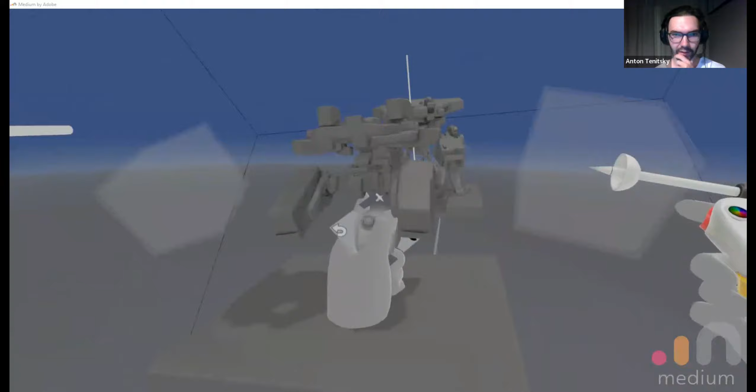That's really cool. So we have this podcast because originally we used 3D Coat, say back 2-3 years ago. So what made you switch from 3D Coat to Medium?

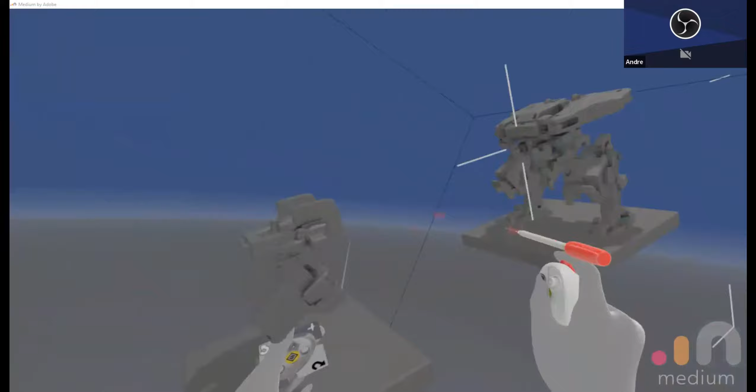It was kind of random. I just picked up a headset one day and was like, 'Oh, I'm gonna try to sculpt something.' I really enjoyed working in 3D Coat because it was voxels, and Medium is the same way - it's still voxels, so you can sculpt away at stuff. It works kind of the same way, it's just I find it so much faster for concept. I can make stuff really, really quickly, and for concept, speed is really important. So that's what made me switch.

I find it just more free to sketch in VR than on a screen. So what I find myself doing often is just switching to top view, left view, right view in 3D Coat to do something - and here you don't have to do that, right? You don't have to. I can sculpt something on top and then go underneath. I don't need to isolate the part and then go sculpt - I can just directly go under the thing and start sculpting.

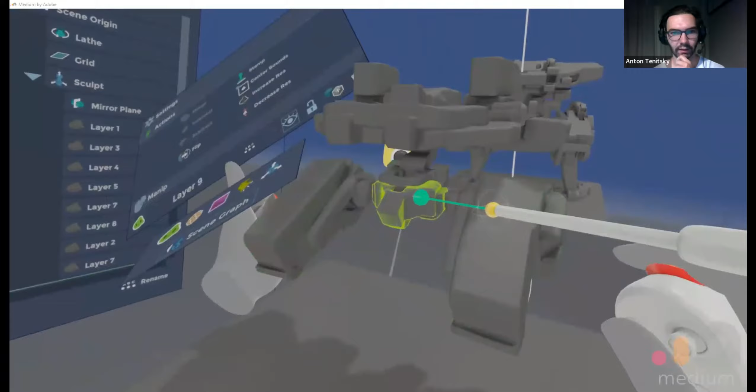And did you ever think about doing a sketch here but then doing a final or semi-final polish in 3D Coat? Did you ever have the need to do that? I tried it, also tried it in ZBrush, but at the end of the day I don't really need it. Everything that needs to be really polished, I can either paint on it or give it to a 3D modeler that will just take the mesh and do the high res directly from the mesh. So it's super useful in the production pipeline because you don't need to give a top view and side view and different views to your modeler - you can just give them the mesh itself and they can design on top of it.

Yeah, no, it's really interesting. I guess I myself like to do more of a semi-finished piece, so I'm still a bit hesitant to jump on sketching the shapes like that, but I should definitely go and try.

I really wish that 3D Coat had some kind of VR capability.

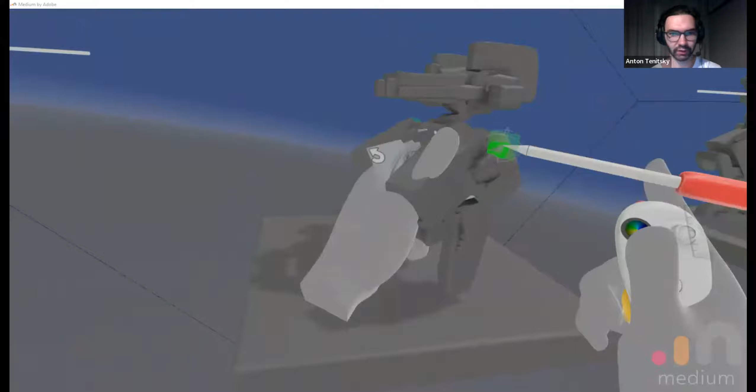So I guess one thing I like about Medium, and what I can see you doing here, is that you're not using that many tools. No, I'm just using one square brush, my favorite brush that I made, it's just like a shape. But I have a bunch of different brushes that I made to sculpt stuff. The tools are pretty limited, there's not a ton of them, but they work super well together.

If you look at this, it's only a couple of tools. I use this, which is like the sphere brush or the clay brush, and this, which is like the pose tool in 3D Coat. You can stretch stuff, and you can deform it.

What's the resolution like, or how big is the model? It looks like maybe 500,000 triangles right now, if you look, something like that.

If I ever need to clean something up, I'll take this part and upres it, then sculpt more details on it. Usually my finished sculpts are around 20 to 40 million for a fully done piece.

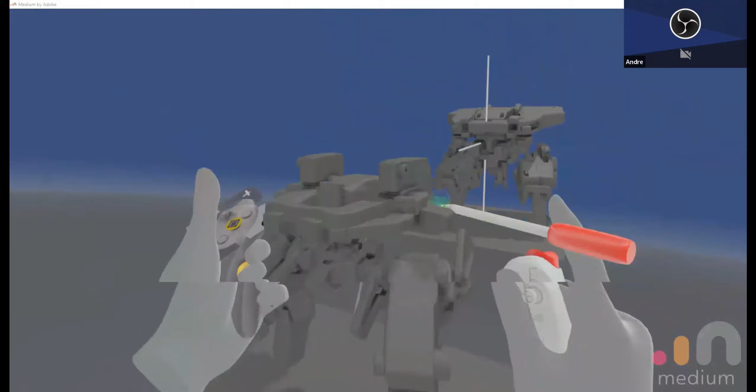Does it have any lag at all? No, the only time it really starts lagging is because there's a limit on the layers, and if there's too many layers it'll start lagging. But most of the time, if you manage your resolution properly... it's the same in 3D Coat, right? If one layer isn't at times 16 resolution and everything's super high res, everything's fine, you just need to manage your stuff properly.

Yeah, there's a little bit of a lag, it goes...

It's pretty cool. We've just been talking about it before the podcast, that you were mentioning Adobe is moving to Substance Modeler now. It's going to integrate with their whole Substance suite, for texture and all that stuff.

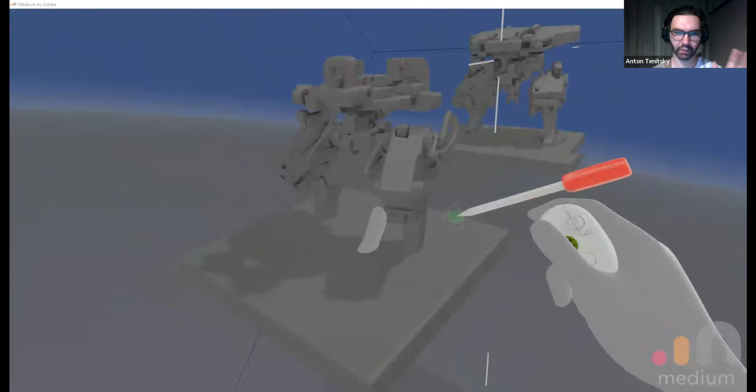Did you play much with it as well? Yeah, I played with it quite a bit. I'm still using Medium because I find it more refined as a product. Modeler is still in beta, so there are some glitches and weird stuff happening, and the tools aren't as straightforward as Medium.

Yeah, that's what I thought too, because I looked at a couple of YouTube videos and it looked like you have to press a lot more buttons, right? Yeah, it's just not as polished.

For sure, one day it will be, and then I'll make the switch. Every new update they have, I try it out and see if it's workable. But when I just need to get something done, I go into Medium because it's second nature, I don't have to think about the buttons, I just do stuff.

And you were saying that Modeler became more of a major focus for Adobe now, that they're not really updating Medium much anymore. Yeah, there's no updates for Medium, but it's still usable and it's free.

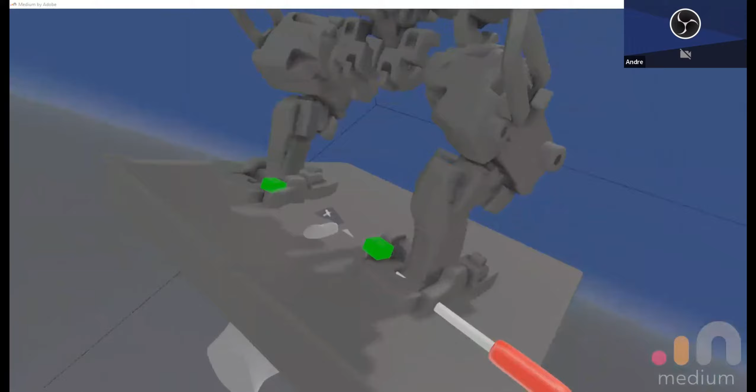And how long did it take you to get proficient with Medium?

You can get proficient really fast because there's not a ton of tools. You're just sculpting what's in your head, so if you're good at sculpting, it's like playing with Legos. In a couple days you can make pretty much whatever you want, and to get really good and forget the tools, it's like after a month. It's cool, it's pretty fast.

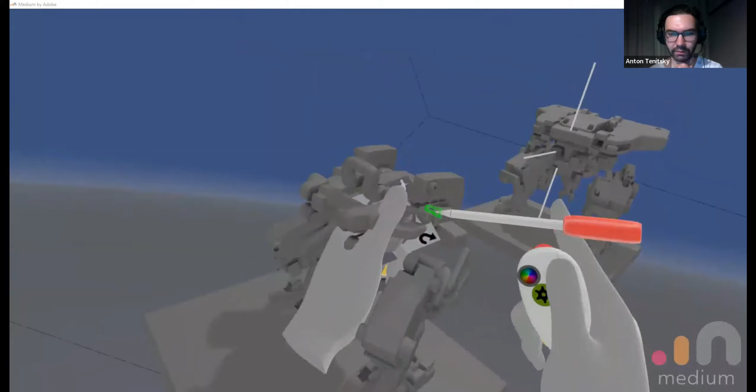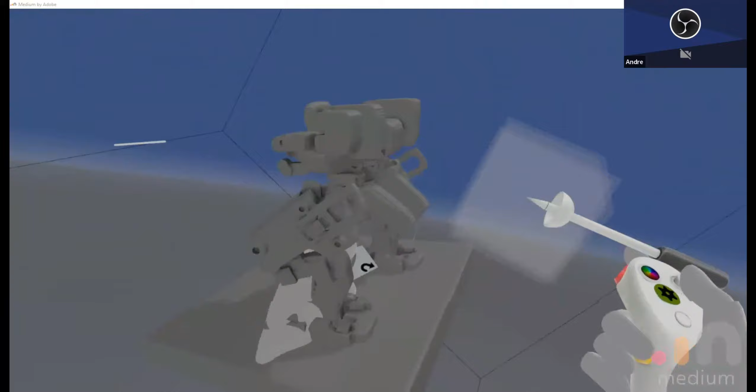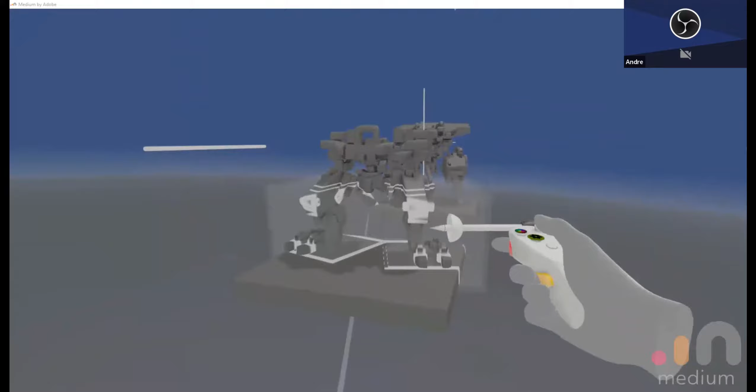If a concept artist comes up and says they want to switch to 3D, would you recommend Blender, 3D Coat, or Medium? It depends on your workflow honestly. For me it's Medium because it's the tool I like the most, but some people like sketching, and for people who do environments it's probably better to use Blender because you have textures, volumetric fog, and all that stuff. But for what I do, it's more object based, like props, so I like this because for me it's like I'm playing with a figurine, a Lego or toys. It's easy to move the parts around and pose them.

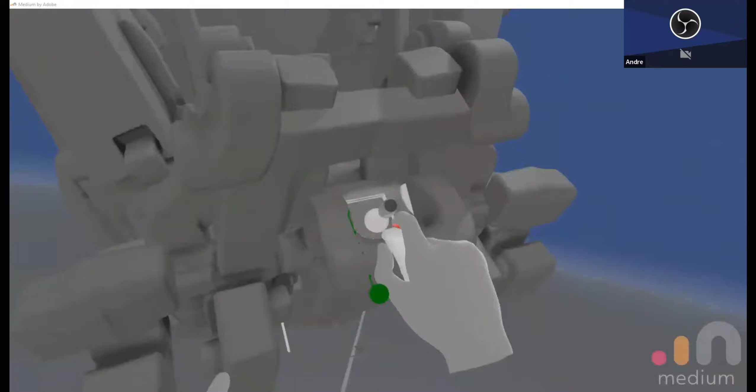You get a really good feel of the scale. You can make stuff really big or really small, have it in your hand. That's really good, especially if you're designing guns. You can hold the gun in your hand, make a handle, and have the scale of the handle on your hand, so it's easy to aim down sights. Or even if you're making a mech, you can sit inside of it and design the cabin, the inside, design around you - it's a lot of intuitive interaction.

Have you ever gotten dizziness or issues working in Medium for a long time? At first when I started, yes, because I was spending like 8 hours and not taking breaks, I was so excited. But if you take breaks every hour or so, you should be fine.

What headset are you using right now? Right now I'm using an old one, it's a Rift S, but on my work computer I have a Quest 2. I think there's a new one coming soon, so I might get that.

Is the Quest independent, not connected to the computer? To use Medium you still need to connect it either with a wire or with streaming, so you don't need to be plugged in, you can use it wireless, but you still need the processing power of your computer to use it. I imagine wire would be faster though, less laggy? It's about the same. The frame rate becomes an issue when you're playing a lot of games and need fast pace, like shooters or racing games, but for stuff where you're just sitting down and sculpting, it's fine, you can use whatever.

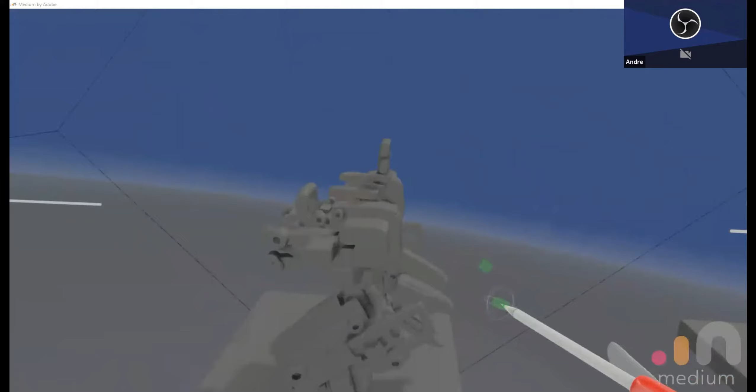Do you usually sit down or stand? I'm sitting down all the time. Maybe it would be better for my health if I was sitting up straight or standing, but I'm lazy.

That's really cool. I wish 3D Coat would start introducing some kind of VR support with their tools, maybe do a VR room with some simple tools where you could just jump in and do a similar thing, with the ability to use all the richness of the 3D Coat tools applied to voxels. That's one thing I wish Medium had, more of the 3D Coat tools, because there are some really cool ones, like tools to make surfaces on top of surfaces, or a blob tool, or 2D paint.

For the environments, I do like that in 3D Coat you can do destruction pretty easy. So if you need to do something like an old temple, or something wooden, 3D Coat can be pretty fast. But of course in Blender you can scale it really fast too.

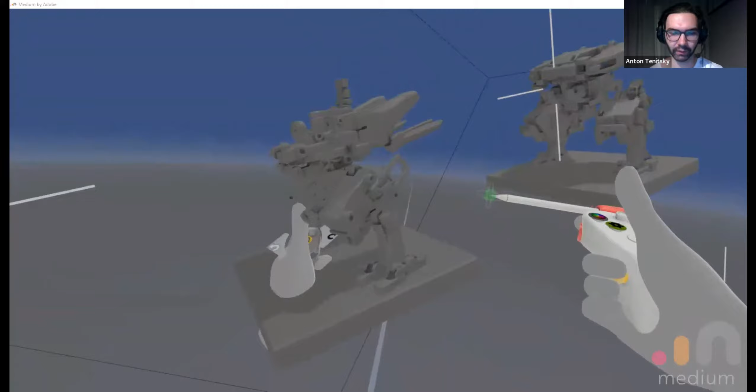In Medium, there's still stuff to do like rocks if you want more organic stuff. You can import whatever mesh you want and use it as a brush, so you can still do really good organic stuff. I do mechanical stuff because that's what I like doing, but there's some people making crazy sculpts, like faces and creatures and all that stuff.

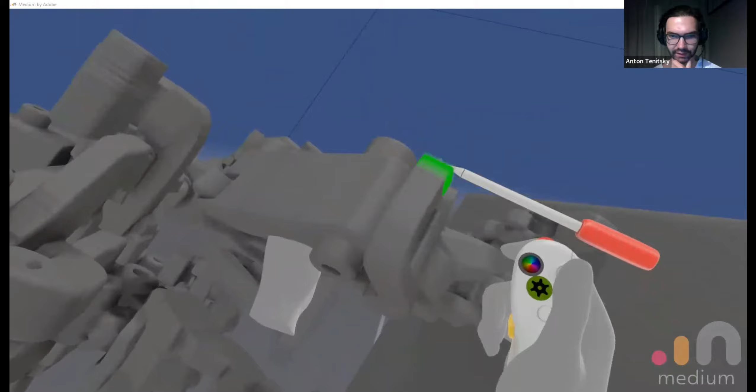Interesting. I think I'm also more of a surface guy, because for sculpting, I still think ZBrush is still there - still hard to beat how good it is for just regular organic sculpting.

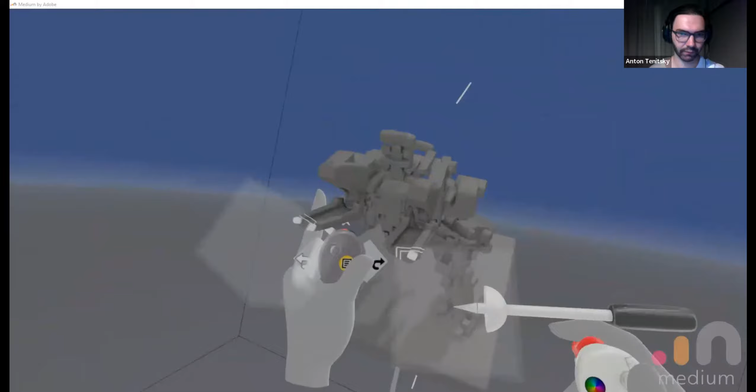So what do you do right now - is it really different from what you do for work? Is this more your personal projects, which you can use for NFTs and such, or is work stuff fairly similar? Stuff that I do at work is not as futuristic in terms of subject matter, but in terms of technique it's the same, in terms of tools it's the same.

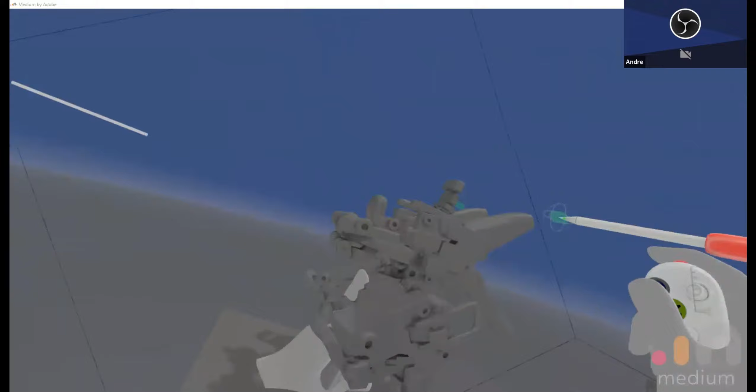I don't know how much I can talk about it because the game is not out yet, but in general terms it's still mechanical stuff, then vehicles and props, and boxes.

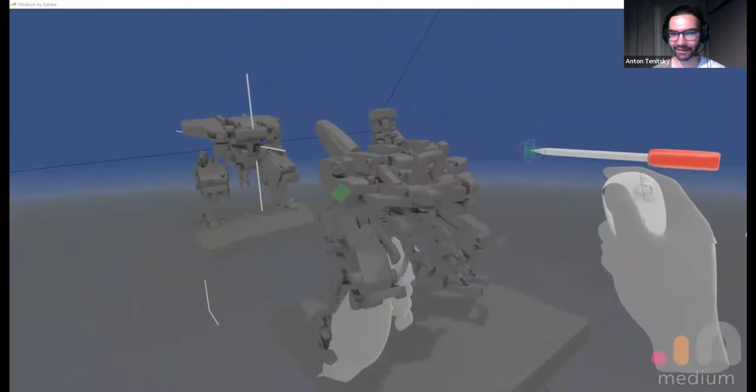I'm thinking about AI now - this is like everybody wants to talk about it. Oh boy. Yeah, let's talk about AI a little bit. Andre, I think you gave a pretty good, interesting demo about how it works for people, and I think right now everybody's discussing it, so I wanted to get your opinion as well.

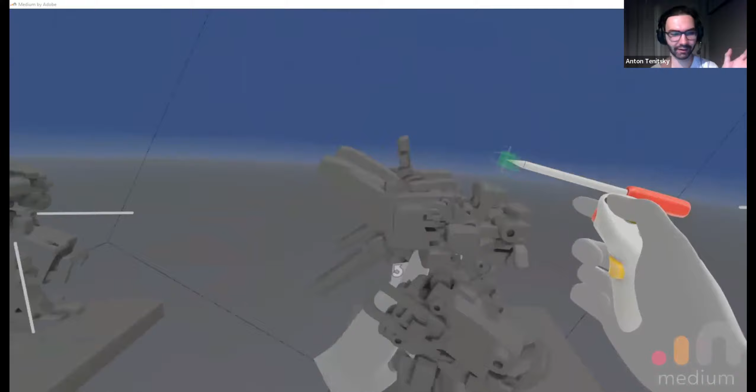Yesterday I was looking at Stable Diffusion for 3D - now they do 3D models, I was waiting for that. It's just text input - you say a frog riding a motorcycle, something like that, and they get a frog and a motorcycle which is full-on 3D. I get a 3D morphing model from different types of motorcycles, they morph into each other as a mesh. Nice.

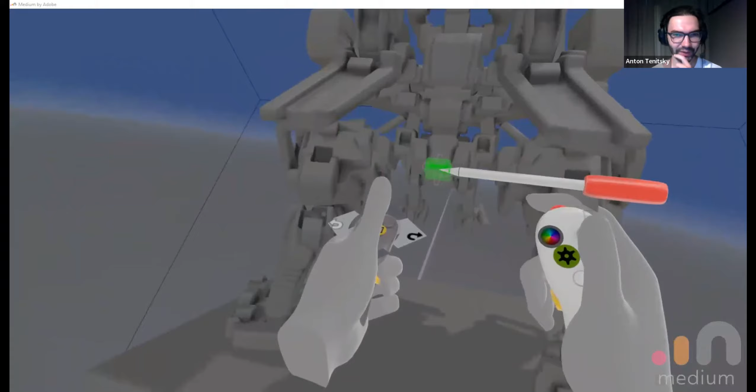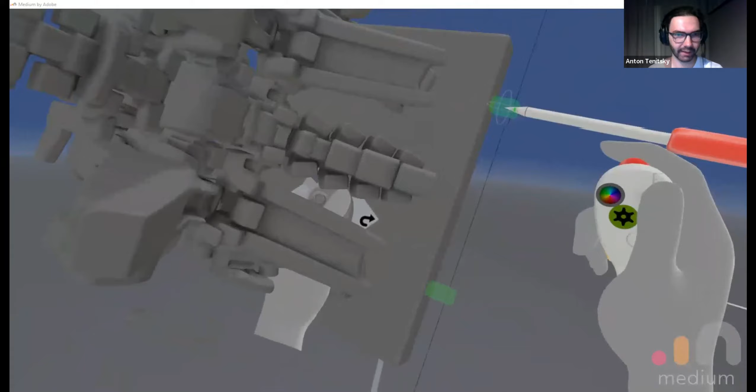I really don't know what to think about it, to be honest. I'm still thinking about how it will affect the whole industry. I hope it'll be a positive thing, that we'll be able to just do more content. With games, you'll still get artists who will be producing 10 times more content for the games, so the end user, the gamer, will get a lot more stuff happening.

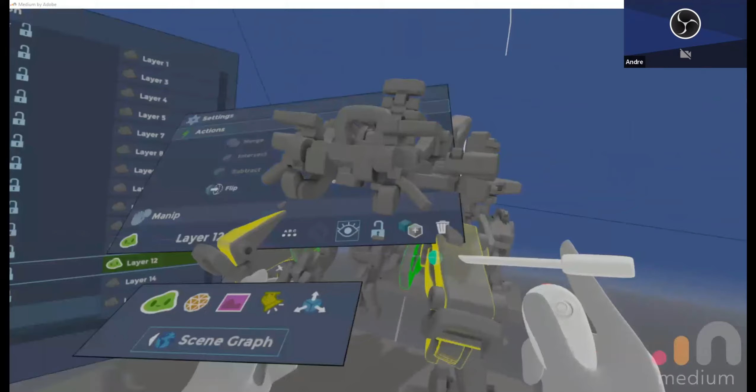I think it's a really good tool and it allows people to make more stuff. It also lowers the bar in a way where people don't need to learn a ton of stuff before they can start making cool shit, which in my opinion is good. I get when people are upset because it's stealing the style of whatever person, but in my eyes it's just another tool. Like when people discovered photo bashing and all that stuff, it's the same thing - people doing concept in 3D, it's like 'oh you're cheating because you're using 3D.'

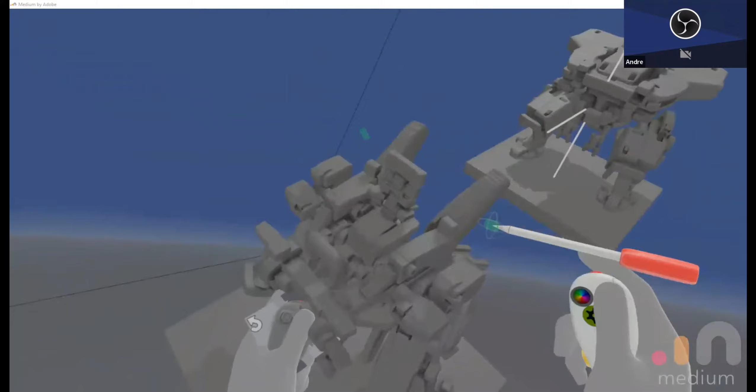At the end of the day, our job is production, not just art. You use the tool to make something cool. There are a lot of elements, especially with games - so many elements that go into production. Just an image doesn't do everything.

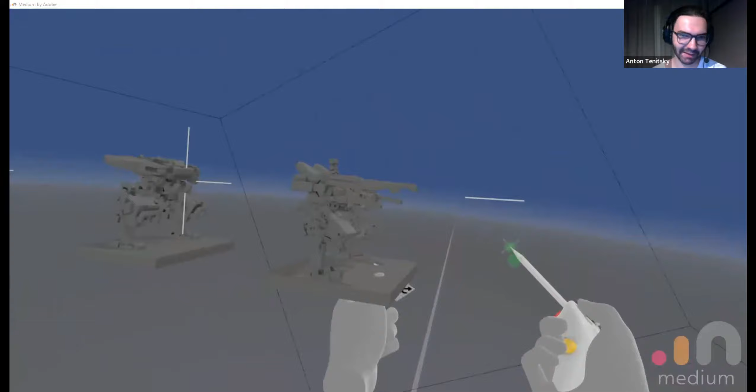The one thing I was hoping they'd start doing is optimization with AI - can it just do it? Can it make all the low poly models automatically, and all the UVs done nicely automatically? That would be great. Please use AI to do retopo and auto UVs. Someone who can figure that out and make it work well is gonna be so rich.

People have such a drain on everything, and people hate that part of the job. But it's kind of funny when people get protective about those jobs - like the most boring parts of 3D production. I mean, it's already been outsourced probably.

Because you don't necessarily need a concept artist to design a trash can. You can just say, make me a trash can, or make me a lamppost. So some of these lower, less fun prop jobs are just gonna get replaced by AI.

But at the end of the day, you still need to tell the AI what to do, use it to make something cool, and pick what's good - you can crank so much stuff out with AI, but you still need to say 'this is a good one, I can use that to make something else.' Then you need to give the concept to a modeler, and the modeler needs to animate it. There's so much pipeline - it's not just 'oh, I make cool art.'

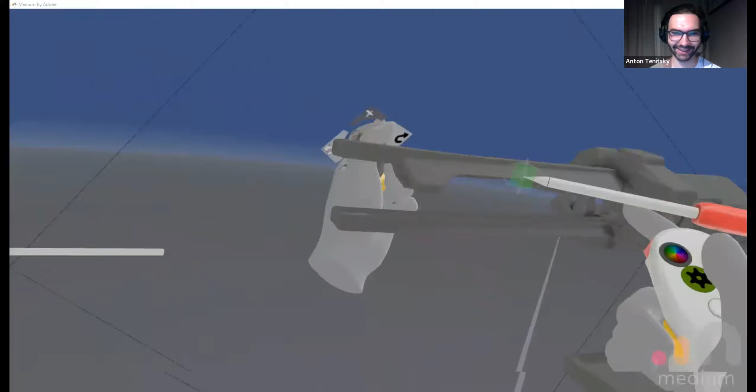Especially when you go to VRChat and stuff like that, you can see people with some crazy creative ideas. I've never thought about that - they just come up with crazy skins, like a cloud of smiley faces. Wow, imagine if they gave those people a VR AI tool to create something totally super bizarre and interesting.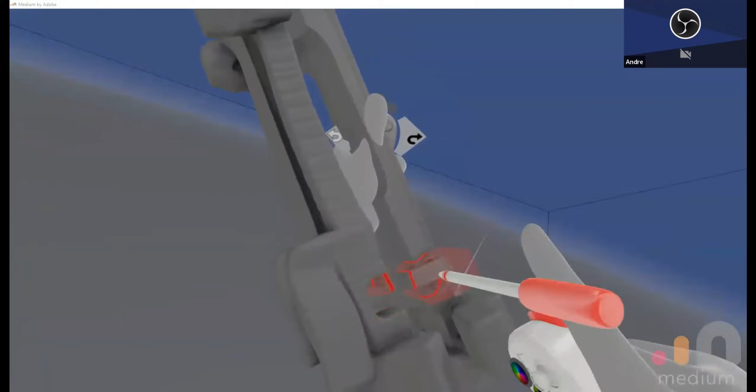I think the people worried about AI stealing their jobs are probably not focusing on the good part of it. Making fan art is cool and all, but it's not as sustainable as production of video games or fresh IPs, I guess.

I was always looking at what's the future of the technology - what's going to become automatic. So if you look into something super technical right now, or super slow - like simulation, simulation is still super slow.

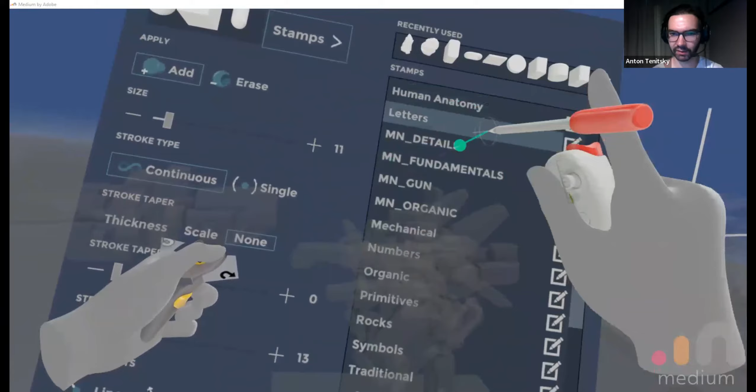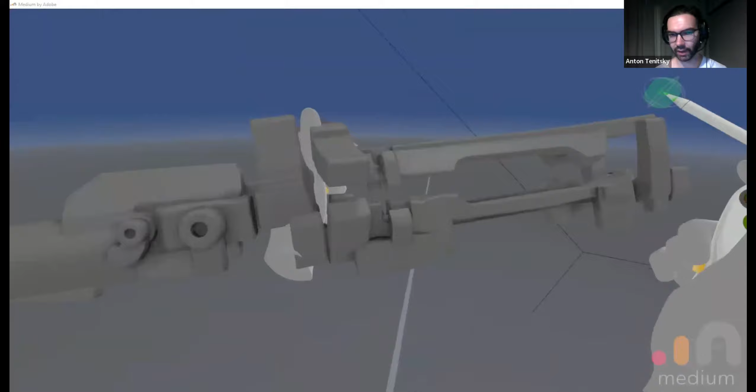If it's like, 'oh, I want to play with water,' it's caching gigabytes of data and it's so slow. Instead of waiting for a simulation to run for 50 hours, I can learn something else for 50 hours and be more proficient. I was thinking about traditional artists doing traditional art, getting really good sculptors, really good concept artists - for them it actually gets easier and easier to transfer to 3D and technical jobs, transitioning those fundamental skills.

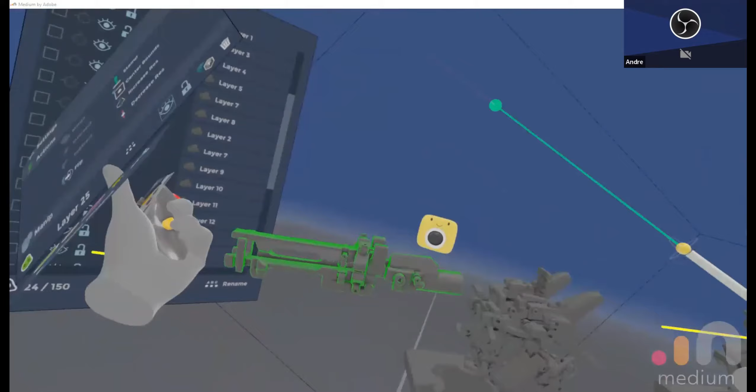I saw an artist who's a really good painter, and he used AI. He made a cool AI drawing, then repainted the whole thing with oil paint. It still made an absolutely insanely cool painting, but it came from AI - he just repainted all of it to show that he's capable of doing it.

I'm really curious what it's going to be like in 10 years, that's gonna be crazy. That's why I think it's important to jump on it right now.

Same thing with VR - it's a cool new technology, and I think it's important to try to learn it and see where it goes. People are upset about AI, but it's not going anywhere. It's just gonna keep going and going and be a huge thing, so might as well jump on it right now and figure out how it works.

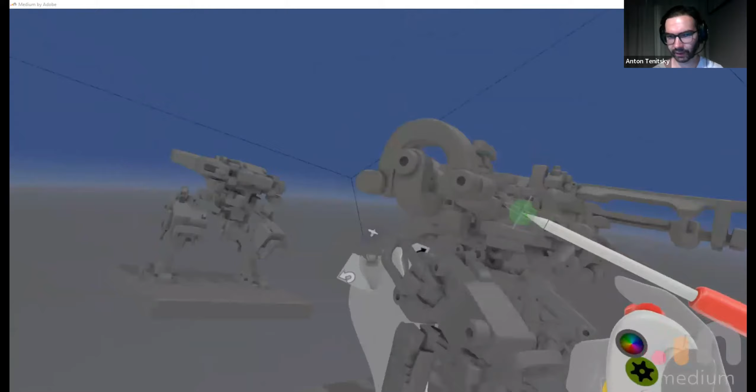I remember when I had my first job, say 11 years ago, at an animation studio, and I was a texture artist. I was looking at the stuff we were doing and thought, this isn't really scalable - we had like 150 people, you cannot hire more and more artists to texture props. A few years later, Substance Painter came up and made everything like 50 times faster than what we were doing in Photoshop. So I said, okay, there's always some kind of solution to produce more content, make it faster.

For example, right now I work with some Unreal stuff, and doing set dressing - putting props around - is really time consuming. Putting a lamppost, a trash can, a pile of dirt takes hours.

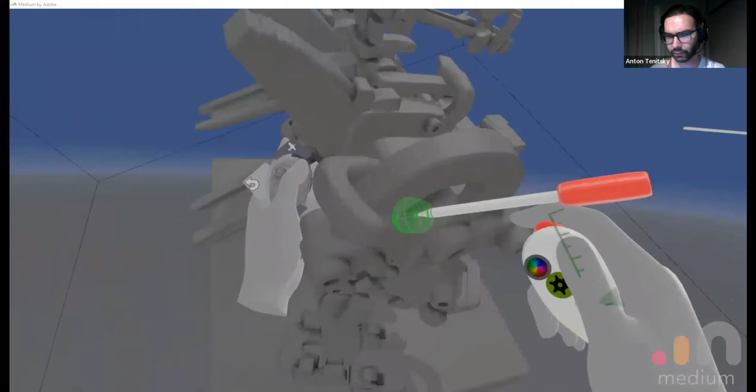I was watching another video from Ubisoft - they have some automation for that, tools that can spread forests along a road. I saw that too, it can help you out with that. But again, it's one of those things that's really quite annoying and super time consuming.

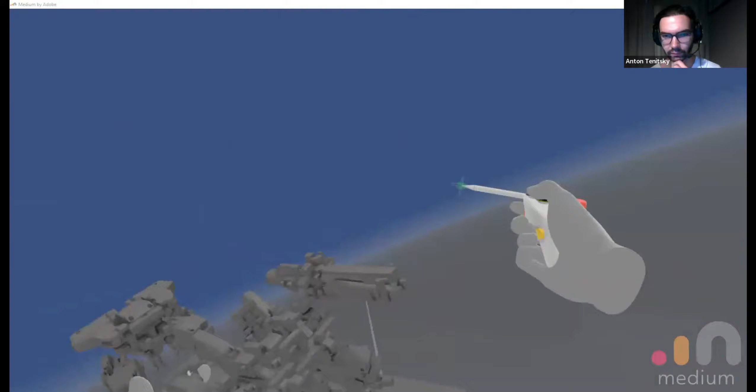I hope the tools help people get more creative and remove the technical side of it, the boring part, so people can focus on what they enjoy doing - creating designs, storytelling, building worlds and all that stuff.

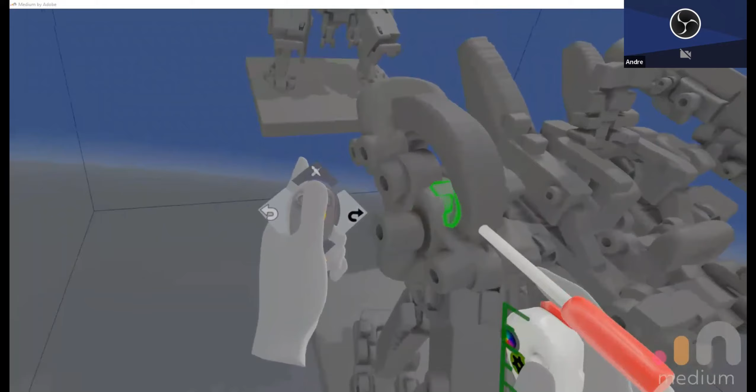Yeah, I agree with you. I don't really know what else to ask - I think it was a really interesting overview of Medium, and I'll definitely need to get a Quest headset finally and try it, and maybe do a combination of Medium and 3D Coat to show the best of both worlds.

Alright Andre, thank you for coming. Of course. And you're in Quebec, right? Are you in Montreal? Yeah, I'm in Montreal right now. Alright man, thank you, it's been a pleasure. Good luck. Yeah, thank you.

So here we did have a little off-topic personal conversation. Meanwhile, he just kept on sculpting the robot, and I was really quite curious to see his process. He continued building the elements, and introduced one thing I really enjoyed - he showed using the glowing tool to paint some of the lights on the robot.